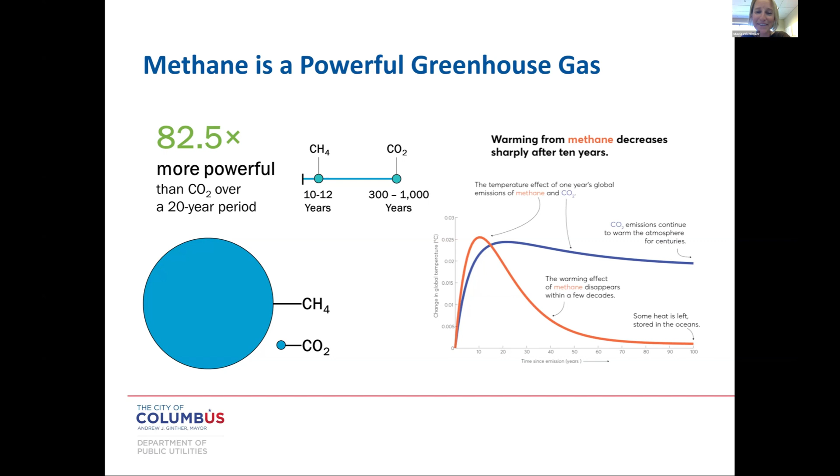And then of course, over time we address the CO2s, the nitrous oxides, and the other ones that are still causing problems as well. And something to keep in mind for us too, methane, it's fuel, right? So that's going to be something to keep in mind for the future parts of this presentation as well.

So when looking at this particular effort and trying to determine what would drive this effort, why do we want to do this, why is this important to us, we've got a lot of things that we'll evaluate when it comes to projects and the different aspects we like to keep in mind when we're scoping and moving through projects.

The first one is safety, right? Odors and safety - methane is a gas, and it's a highly flammable gas, and it causes safety concerns at our plants. Maybe not as much odor concerns as some of the other odors that come out of our facilities. But we know, what we thought we knew, certain areas of our plants that had these concerns for safety - what we found is that we have those concerns in a lot more places than we thought. So that was one of the huge drivers for doing this.

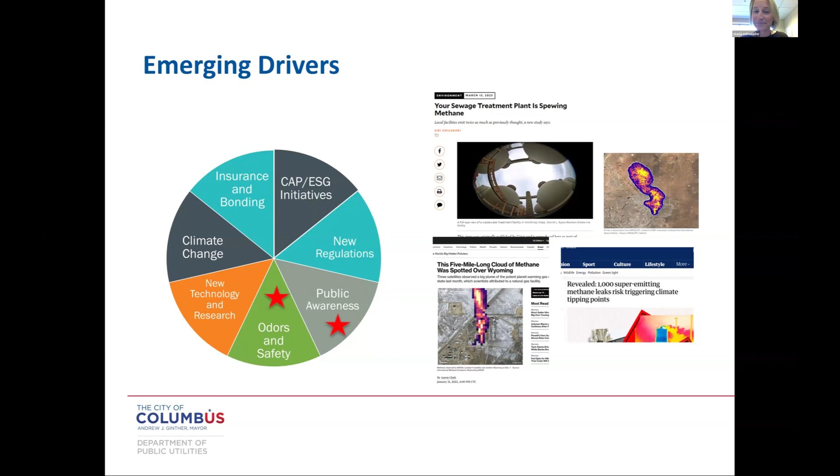Public awareness, that was one of the next ones, right? And this will tie into what I started this off originally saying. We want to know we have the problem. We want to be the first one to know we have the problem, and then to be able to tell the public and others about it. So there are satellites out there that are actually measuring methane.

So there are satellites that have been launched into space that are traversing the planet and measuring methane emissions, or mapping methane emissions. These are generally hosted by or initiated by nonprofits. They're funded by environmental advocacy groups, and they're trying to seek out bad actors - trying to show where the major emissions are coming from, and holding those folks accountable. So the one being shown here is a group called Carbon Mapper. They're flying over the country and mapping all these places where these emissions are happening. Recently they went over the top 10 largest cities in the country and mapped all these emissions, and are working on that data, and will be uploading it to their site within the next 3 to 6 months. So they haven't flown over my facilities yet, but they're going to one day, and then that information is going to be made public.

And so that was, I'm not going to lie, the fear factor was part of it here. We wanted to know what was going on and see what we could do about it. The other element on the slide is our climate action plan. The City of Columbus and our mayor has actually put out a pretty aggressive climate action plan, aimed at reducing greenhouse gas emissions.

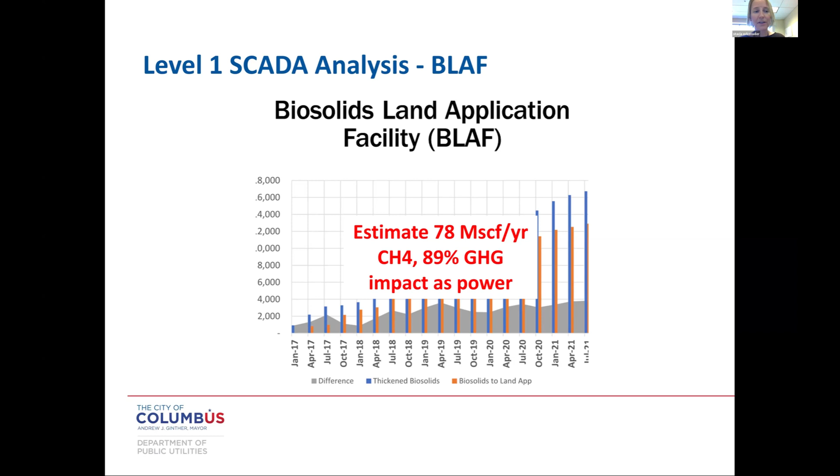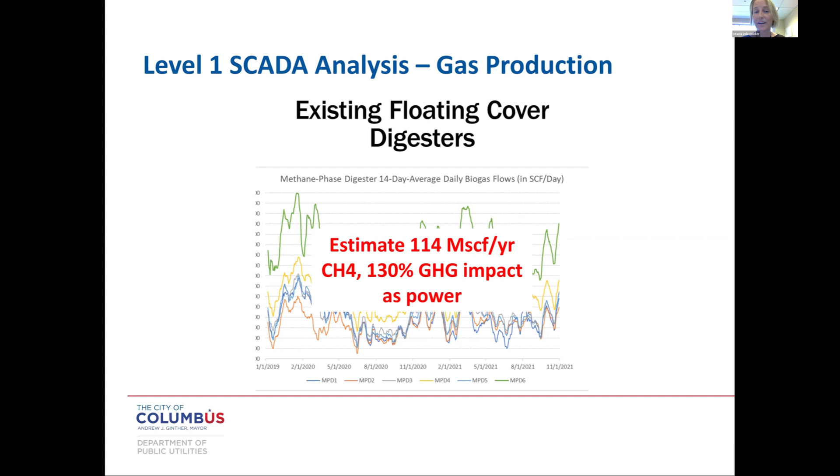That's a lot of power loss. And that's a lot of greenhouse gas being emitted into the atmosphere. So those were the two big items that clued us in, right?

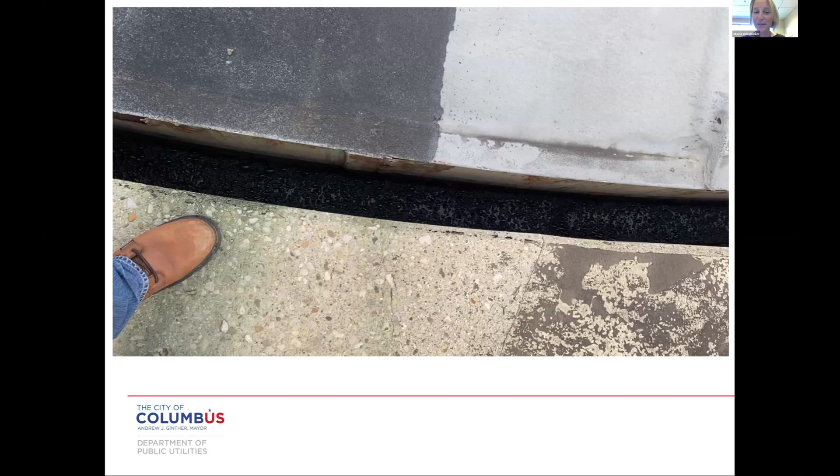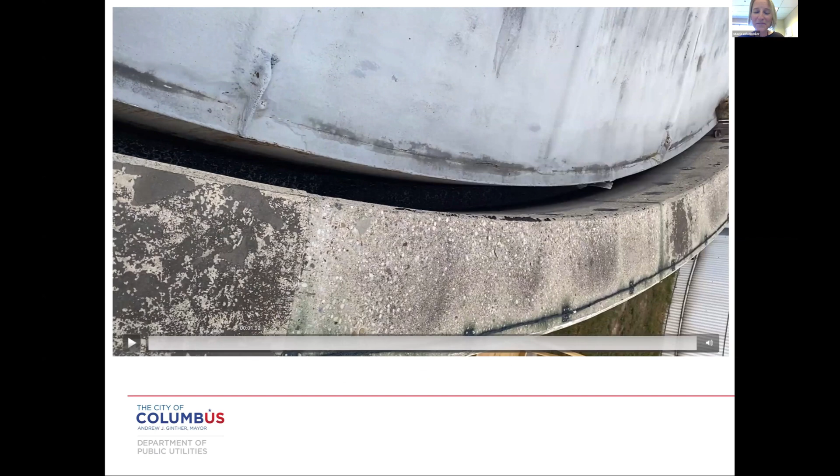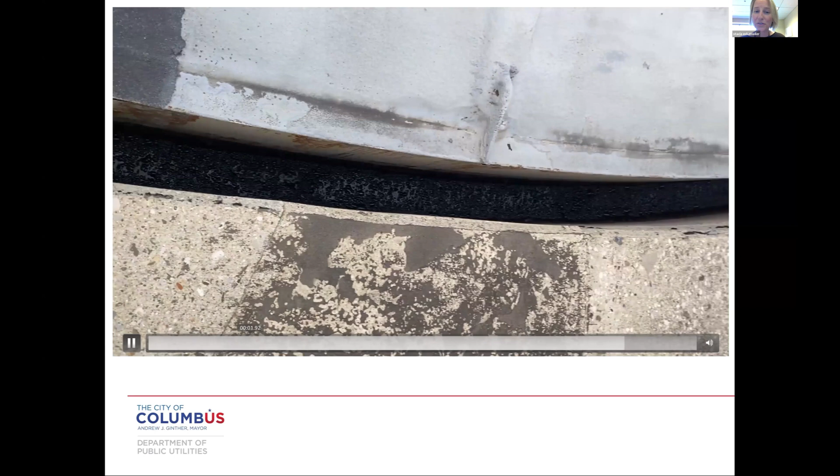If you just go up, this is a video of Dante standing on top of one of our digesters. You just look down into that annular space and you can see the bubbles, that biological activity, and all of that gas potentially coming out of this small seam that runs around all of our digesters. Everybody knows it, we just didn't know exactly how much it was.

So we'll work into the investigation now. I'm going to hand it over to Dante to go into a little bit more detail about what that entailed.

Thanks, Stacia. And I presented that piece, and I am literally pissed that I've never done that Jurassic Park quote, because that is my literal favorite Jurassic Park quote. I can't believe it's in the repertoire now. So thank you, it's going to be a theme in a future presentation, right? Yeah, next time we do a presentation, your face is going to be on a raptor's body. That's already happening, I'm working on it. So thank you, Stacia.

So now we're going to talk about the investigation, and then I'm going to hand it off to Tyler for the solutions. What's super unique, Janine had mentioned, it's the first multi-sensor investigation in the Western Hemisphere. Let's just say it. If anyone else has done it, they're going to correct us at some point. Nobody's corrected us yet. But the coolest part about this isn't just that we found it, that we did the hard thing Stacia just walked through. We investigated it, and they're fixing it too. And it's all happening very quickly in one project, done with pretty conventional technology.

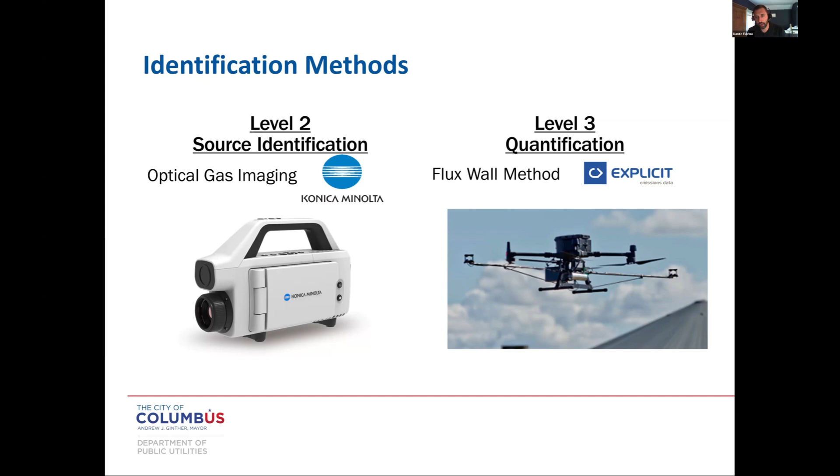With the investigation, there were two levels: level 2 and level 3. First we focused on source identification with the Konica Minolta optical gas imaging camera. That's kind of like the bottom-up estimate—we're finding it, we're pointing at it, it's right there. Then the top-down estimate is for better quantification. You can't just find it and add it all up, it doesn't work that well. So they actually look at wind direction, and they capture the methane plumes and quantify that way.

Looking a little more into the camera, the way it works is actually super interesting to me. It doesn't detect methane directly—it detects gases that deflect light at the same wavelength that's a problem for the atmosphere. The same thing that makes methane or water vapor a greenhouse gas is what this camera is looking for: light being bent at that wavelength through that gas. So it's a very effective way of finding greenhouse gases.

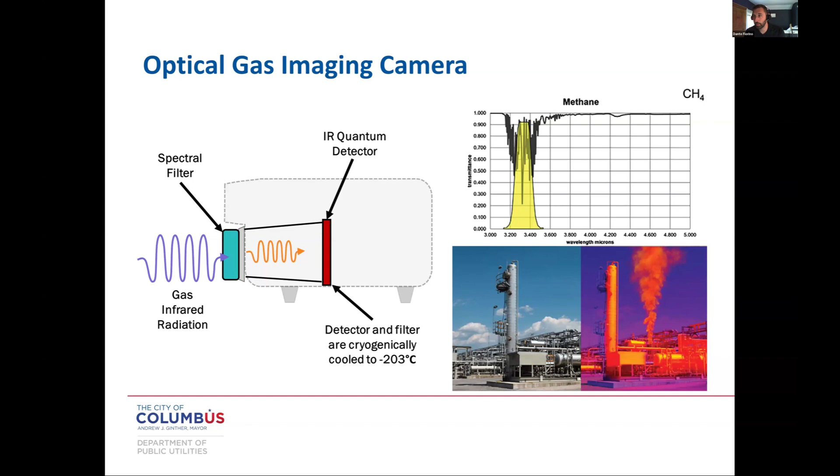Their job is to separate water from solids. They do an even better job of separating gas from solids. That's the first thing that comes out.

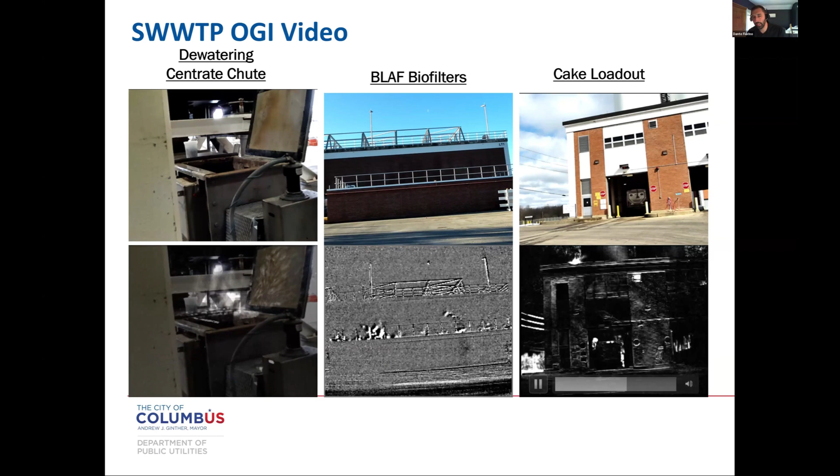And then you've got, this is their cake load out, so they also do dewatering, and they get it, this is liquid, but then the cake load out is solids. And you can even see, there it is, it's being loaded on into the trucks, and there's methane, quite a bit of methane there, and then that is again taken to odor control.

A few more pictures. Oh yeah, they're all moving here. And actually, let me get my little laser pointer. There we have it, you guys can see that. Should have done that before. So this is a PRV. These rascals, every PRV we look at, we find.

So if you're keeping track at home, floating digester covers, lots of fugitive methane. Post-digestion thickening of any kind, centrifuges or anything, a lot of fugitive methane. PRVs, a lot of fugitive methane. And the reason is you can't see or smell it, but all PRVs are designed to be constantly letting a little bit of gas out.

People think that it has to be chirping, is what the operators call it. Chirping is way worse than this, but it's always happening. And the reason is that our biogas systems are not designed for a high enough pressure, it's within the range of where PRVs can release. And so maybe fresh out of the box and installed perfectly, they don't emit. There's not a lot of PRVs that we go to and see that are fresh out of the box or installed perfectly. So this is a problem.

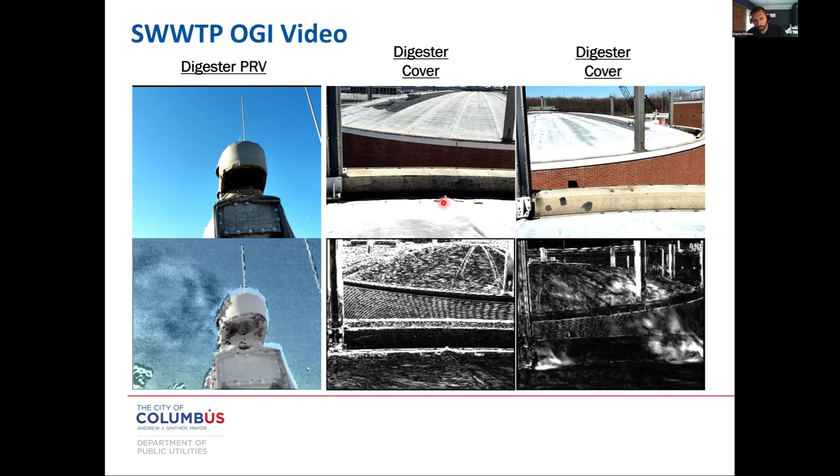Now this is super interesting. Here's the annular space that Stacia showed you the picture from the top. And we've got two same digester, but one is not mixing. And then we turned on the mixing. So you can see, clearly, when there's mixing going on, everyone is aware that there's more biogas produced.

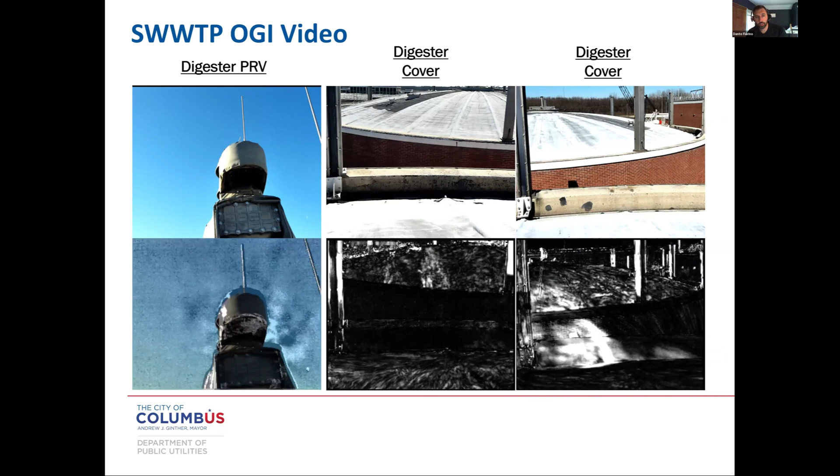Here's another super interesting, crazy thing. We had a structural engineer inspect this weeks before, came out perfectly fine. We just had the camera out and there's a big leak on the side of the digester and it's emanating right into an exhaust fan that leads to the tunnel system. This is a health and safety concern.

We were putting together a report. We took this video, we shared it with Tyler, who's going to be presenting in the city. And this is not an explosion proof fan, so that was replaced immediately. That was a health, and there were a couple of health and safety moments that we had that were really important. This was probably the most shocking.

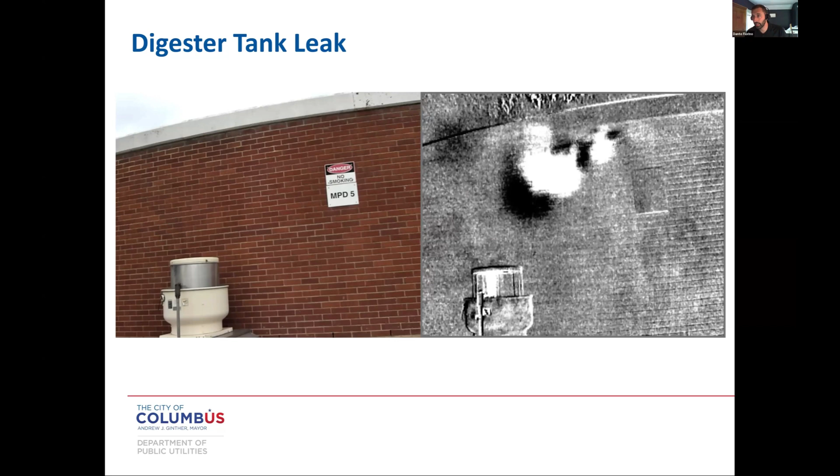But another thing that's really interesting about this, with the camera, you can see what we see live right now, you can see while you're out there. And Trung and I, we could see this leak, but I went up there and touched it and my finger would stop the methane. I couldn't feel it, I couldn't see it, I didn't see a crack. It's really a silent killer. You just have no clue it's there and there's no way you're going to see it.

So that was remarkable. Now we're going to pivot to the drone flux, the quantification piece. So the way this works, it's pretty simple from a technology standpoint. It's a pretty standard drone, they've got a gas inlet and 2 wind sensors. And so what they do is they go downstream of a big plume or a potential plume, and they run a flux wall, that's what they call it.

And so this is kind of like a nice graphical representation. But what this is showing here is, okay, well, here's the ground, and they just start to run and they go up a meter. They're Danish, come across, up a meter, come across, and they do that. And they do 3 walls and they average it out, and it's very effective. It's actually an accredited way of measuring methane. The natural gas utilities are using them, and they have been accredited for multiple countries, including the US. So this is an accepted way to quantify methane.

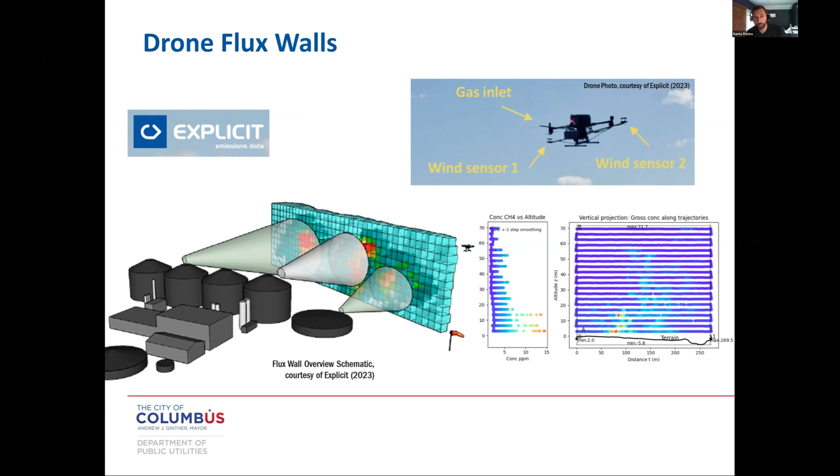We did that. Our first, the 2 examples that Stacia had offered to you, the digesters and the BLAF tanks, this was our first thing that we wanted to find. They did the flux wall right here. These orange lines represent the wind direction, and so the wind's blowing this way.

They did the flux wall right here, and you can see this is the actual real results, and you could see it in real time. And the average of these 3 runs was 50 kilograms per hour. It's less than what Stacia's data would suggest, it's actually less than what we would have calculated based on Stacia's data, but it's more than anybody wants, 2,400 cars per year just in this site.

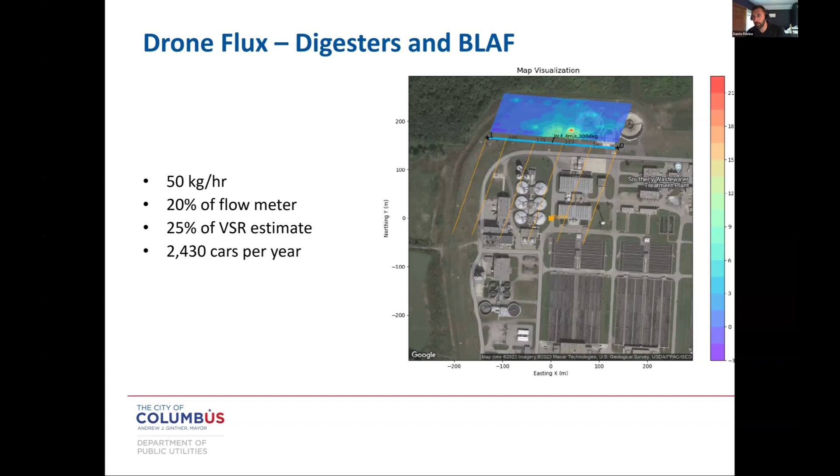The surprise was, and I've already kind of revealed it, but we didn't expect the centrifuges. I don't know why, but we did a bunch of surveys throughout the plant, and this was another very big contributor. This one was 18 kilograms per hour, which, since there's only one source, is actually pretty comparable to the prior sources, another 880 cars per year.

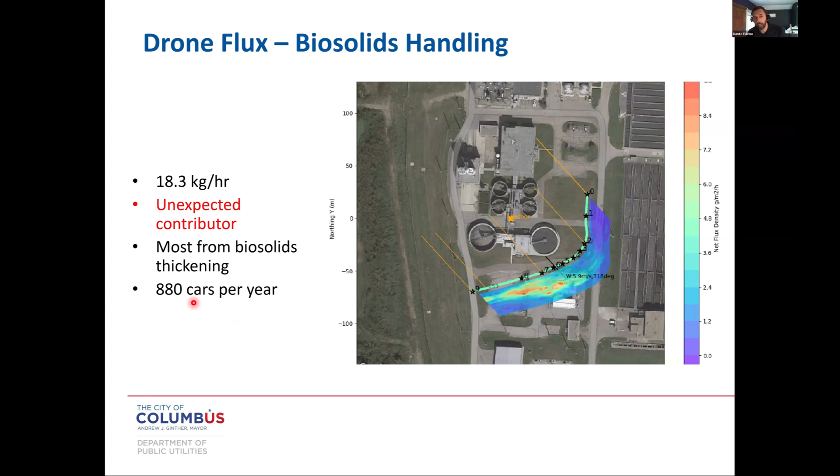So if you add all this up, it gets to about 70 kilograms per hour that we found. One thing that's noteworthy is we checked the waste gas burner, an open candlestick style waste gas burner, and actually it was burning pretty efficiently. You expect with any combustion there's going to be slippage, and it was at about 0.5% slippage, which is less than the EPA assumed 1%. Just to put into context what the EPA would consider acceptable, or what's in your climate action plans for emissions at any given wastewater plant, is typically 1%. That's 4 kilograms per hour.

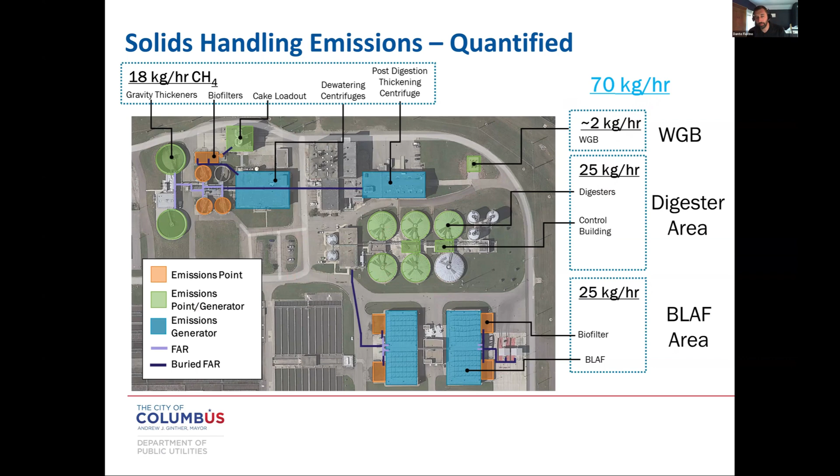Southerly found 70. And this is not unique, they're not uniquely bad. They're 20 times more than what you would expect. This is everywhere. Almost every plant - floating covers are maybe a little unique, but a lot of plants have them. This is a problem we have in our industry, and it's causing real problems for the environment.

So what does kilograms per hour mean? I didn't really know until I started getting into this type of investigation more. My colleague Nancy Andrews estimated, if you have a cogen facility at your plant, how much methane leakage do you need until you start behaving from a greenhouse gas perspective like a fossil fuel power plant? All you need is 7% to be like a natural gas power plant. If you have 15% leakage, you're similar to an oil plant. At 19%, you're a coal power plant.

The day that we went out there, just with what we found, it was 15%. If the SCADA is right, which is probably more accurate because it's over multiple years, but it is theoretical, it would be off the chart. The reality is, I think it's fair to say, Stacia, anywhere here is not acceptable. The city was very motivated - they're doing the right thing for the environment, and they don't want to be doing this. So I always find that very interesting and informative.

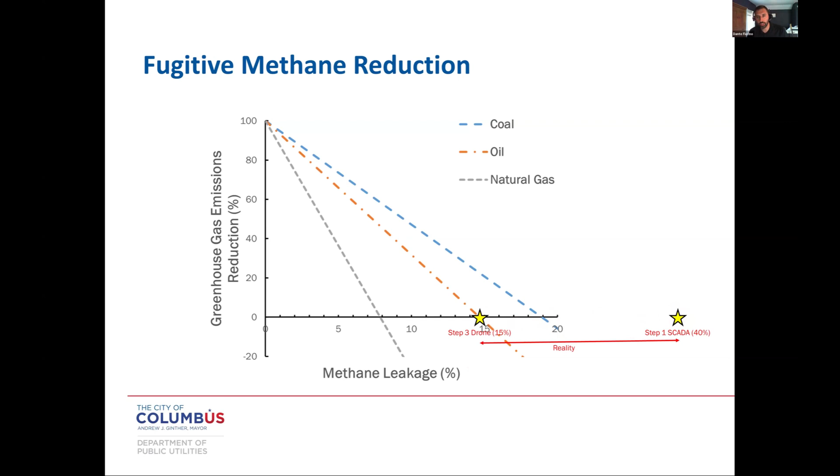And then I'm going to show, because Tyler's going to show you with the bioenergy project and the work Columbus is doing, how much of an impact we're going to have. But I did want to show you, if nothing was done - I already talked about the 70 kilograms per hour - if nothing is done and they continue to grow like we expect in Columbus, the 30-year outlook is 130 kilograms per hour. At 100 kilograms per hour, they're actually considered a super emitter, and the federal EPA is actually starting to crack down on that.

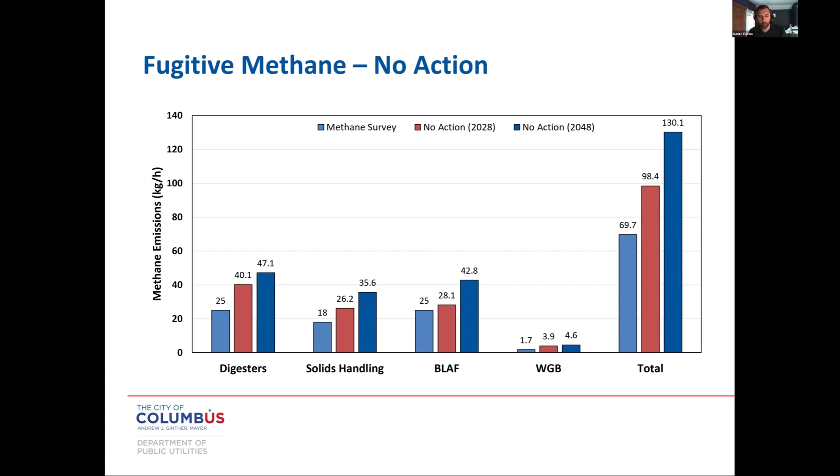I did actually look it up - they're starting to issue fines on a per kilogram per hour basis. If Southerly was fined, which presumably will happen one day in the future, I can't tell you when, it was actually $75,000 a day. So this is not a trivial amount of methane, and they're dealing with oil and gas people first, then landfill people, and then they're going to deal with us. So, doom and gloom, big problem - what do we do? Tyler's going to come and save the day. So, Tyler.

So after we saw all of this negative stuff, the focus on our end really turned to, okay, how are we going to fix it? We know our major contributors: we've got our floating digester covers, our biosolids holding tank, our thickening and conveyance, and our PRVs. But how do we address each of these individually? Well, for us, the low-hanging fruit here was obviously our digestion system. Go ahead, Dante, go to the next one.

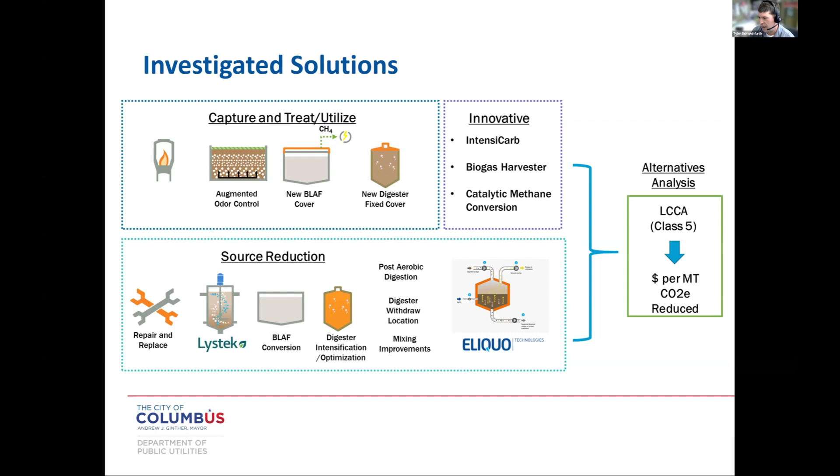We looked at each area individually, at source reduction and capturing and treating. We first looked at our digestion system as a whole, because that's where we found the most emissions coming from.

In our existing state, we hold our solids for 15 days. We are SRT limited at our Southerly facility. We have 6 million gallons of digestion, and we're already holding solids back into our secondaries just so we're not overloading our solids system. That's causing undigested sludge, because we'd like to hold it 23 to 28 days. That undigested sludge is working its way through our facility toward the back end, pushing that methane into other areas. So if we can digest it in the digesters first, we can solve a lot of issues.

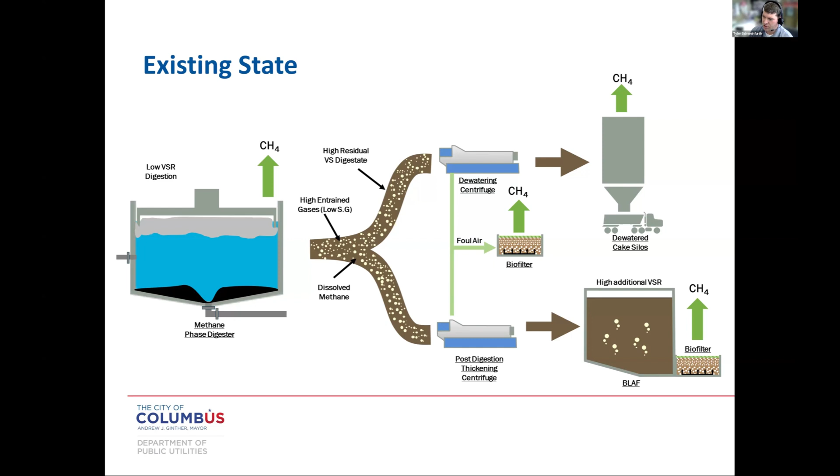So we're looking at doing what we're calling next generation digestion. That involves constant mixing, surface withdrawal, and a longer SRT. We're talking about adding a significant amount more capacity to the facility to allow us to get to those longer SRT times.

We're also looking at fixed digester covers. Let's close up that annular space and capture the gas that's coming out of it.

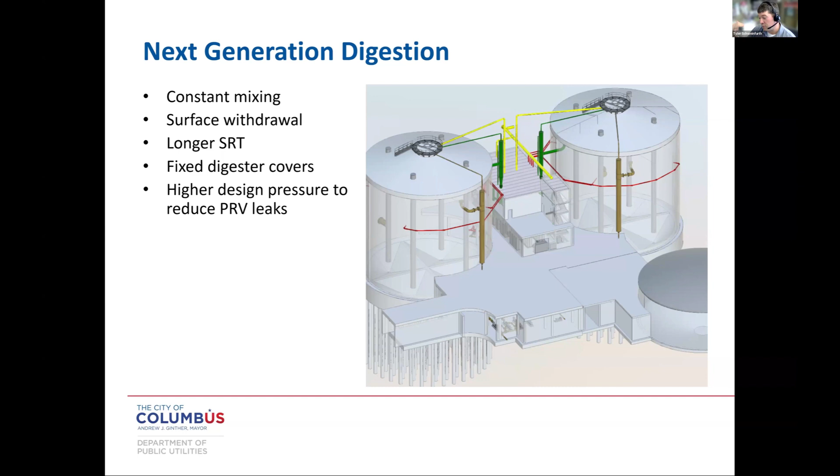So now we're looking at a 60-inch water column. It doubles the pressure within the system, but it also gives us a wider operating band. So if we're operating at 20 inches of water column, we've still got 40 inches before the PRVs should be emitting, but we know it's probably more around 50 inches of water column. It's just a wider operating band for us.

So what does the future state look like? Well, we get more VSR digestion in the new digesters and the rehab digesters. That's getting the methane out in the digesters and preventing a lot of that methane from going downstream. So we wouldn't see as much at dewatering, we wouldn't see as much at thickening, and more importantly, we will not see as much in BLAF.

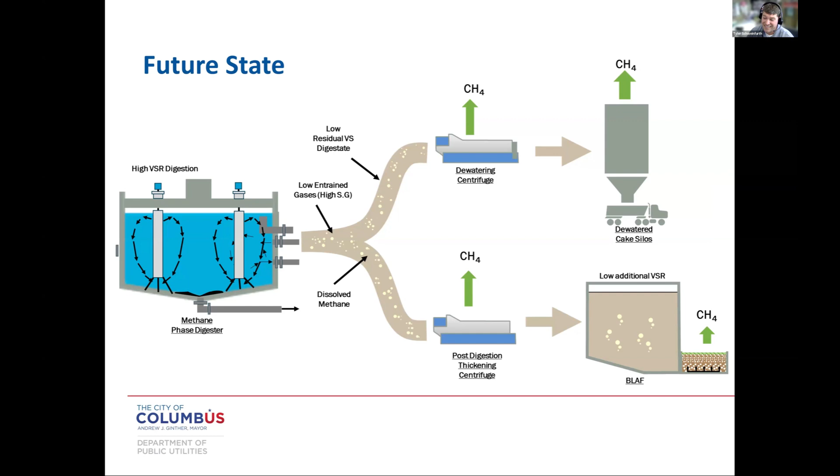And just by doing the enhanced digestion, we've already reduced down to 94.6 kilograms an hour. That's a significant decrease just through the digestion system itself.

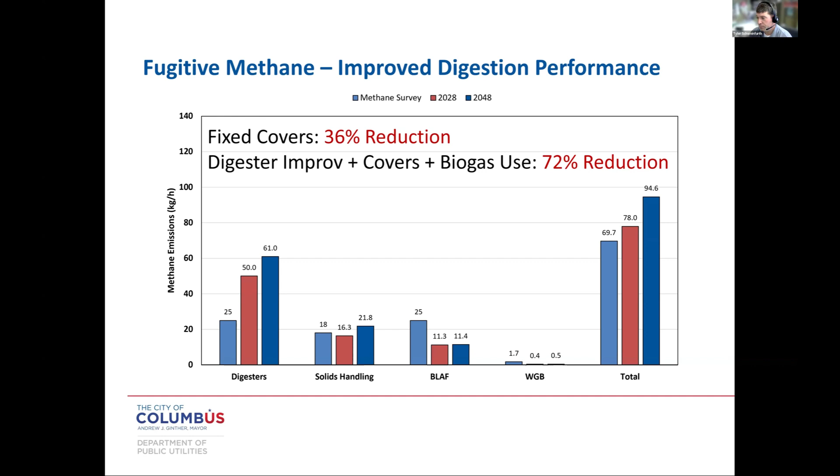But if we fix the covers, if we go to these concrete covers, that's a 36% reduction in our methane emissions. And by going through all these digester improvements, upgrading the covers and adding a biogas reuse, we're getting a 72% reduction in our methane emissions. So it's a significant reduction when you talk about this overall project.

And right away, two of the low-hanging fruits here get knocked out right away, our digesters and our PRVs. We've addressed these known significant contributors.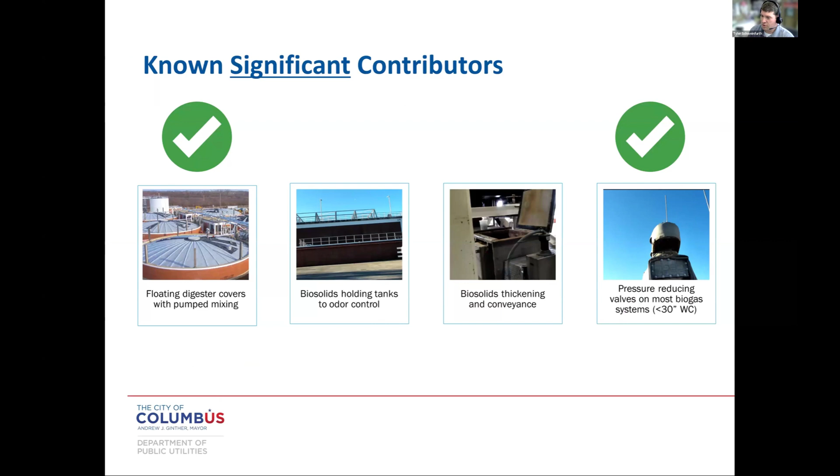So then we looked at our biosolids tanks, our BLAF tanks. We had several options that we looked at here: augmented biofiltration, vapor combustion unit, regenerative thermal oxidizer, doing a fixed concrete cover on the BLAF tank, and also doing a stainless steel cover on the BLAF tank.

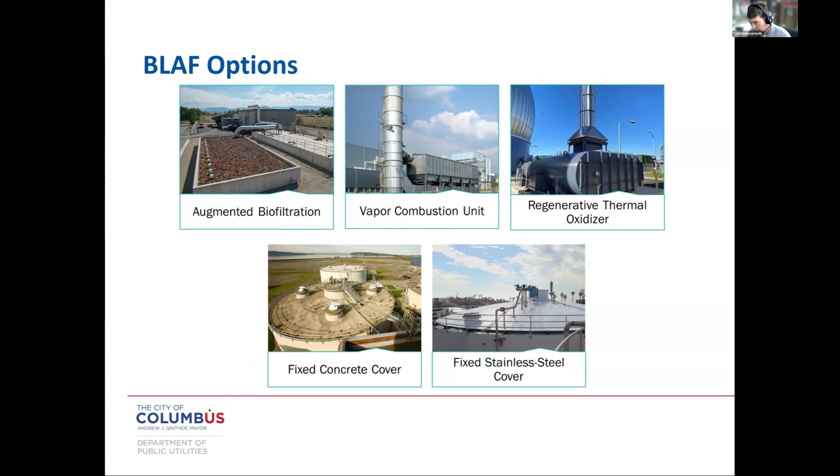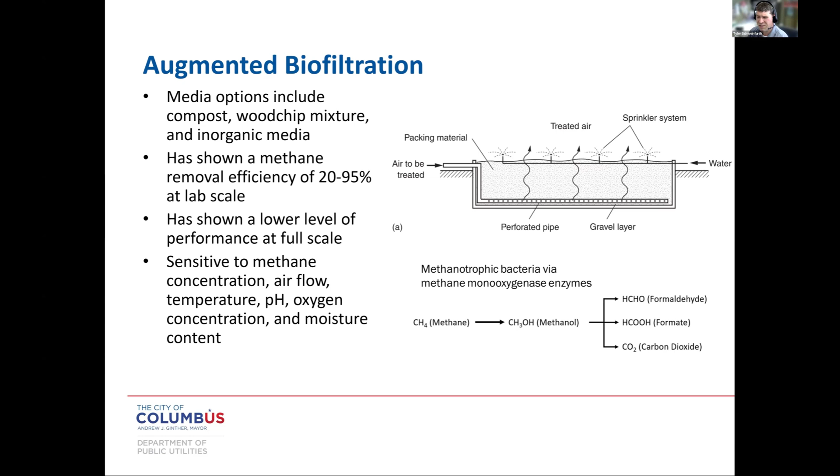I'm not going to touch too much on this. The augmented biofiltration is finicky, I guess, for lack of a better term. It doesn't work real well when you start getting outside its nice, easy operating condition. Once you get outside of that with pH, oxygen concentration, moisture content, it really doesn't work as well. So we just didn't see it as a feasible alternative.

We looked at this vapor combustion unit specifically for BLAF. This is great - this is used in oil and gas. It works really well at reducing these emissions. But there's only a few that are installed at some wastewater facilities.

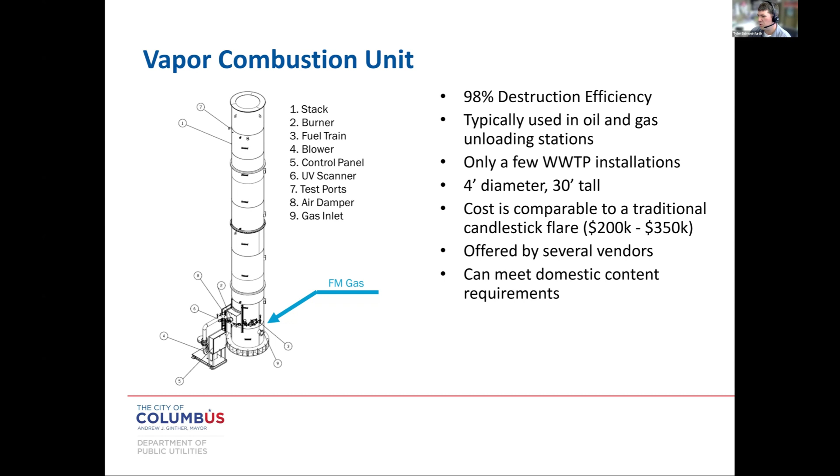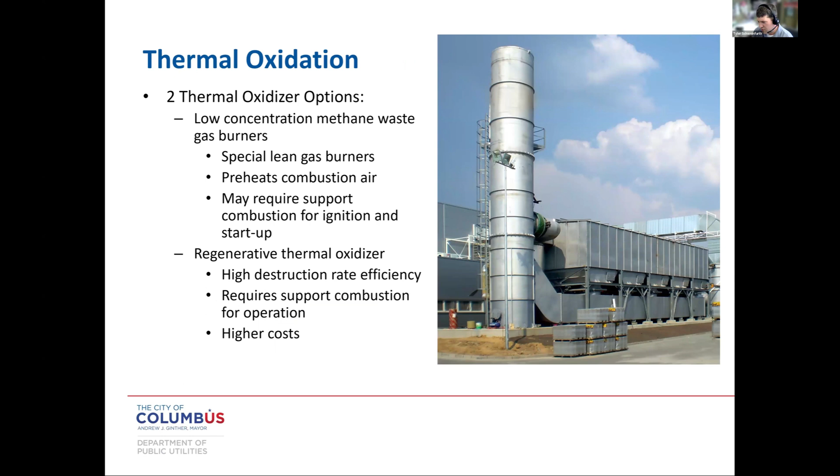So then we looked at thermal oxidation. There are two types: low concentration burners, and the regenerative thermal oxidizer, which is the one we honed into here. Great destruction efficiency, still requires some support combustion, and it is a higher cost piece of equipment.

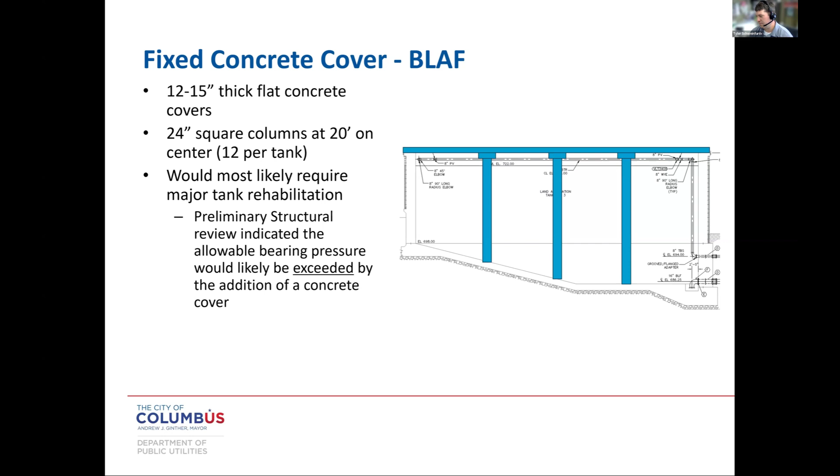Then we looked at potentially putting a fixed concrete cover similar to the digesters on top of BLAF. This was not structurally possible - it's just too heavy, and the tanks weren't designed for this originally, so this was thrown out relatively quickly. And we also looked at a stainless steel cover.

It's got a stainless steel cover on it, but this would have been a little bit different design, better seal on the outside of it. And it wasn't a major rehab.

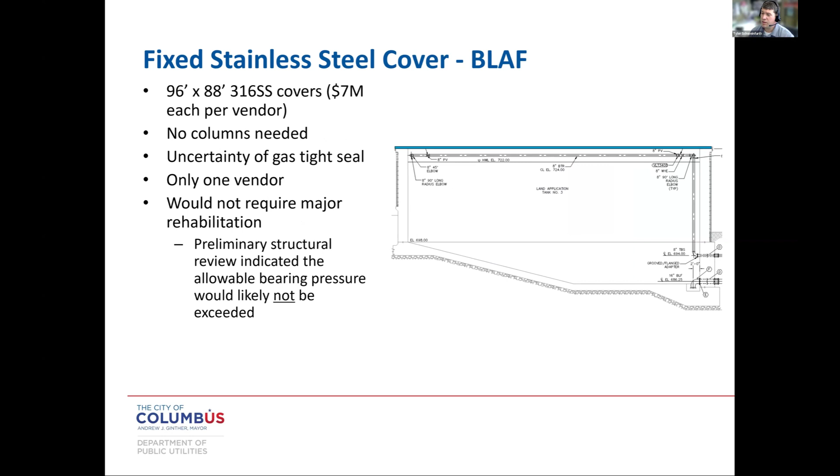So then we compared all 5 of these, and what we really found is that the RTO was our best option here. What happened with the VCU is this is such a lean methane, we were pulling so much air off the BLAF tanks into such a lean methane concentration that we would actually be burning more natural gas to operate the vapor combustion unit in this scenario. So really the RTO seemed to be our best case here.

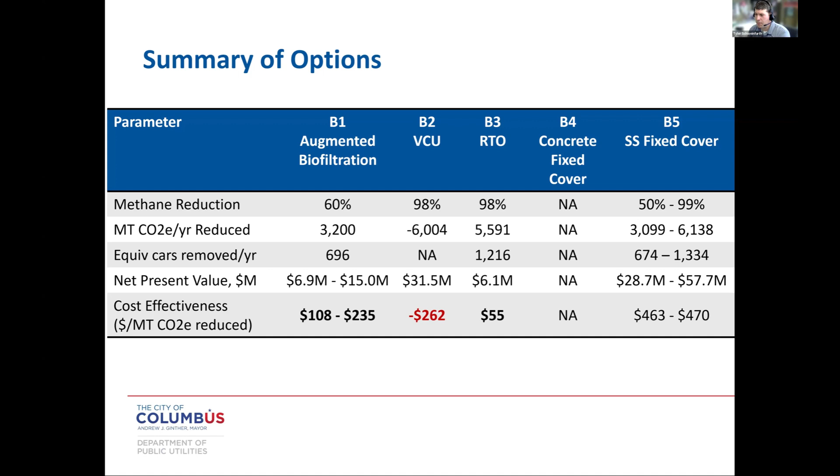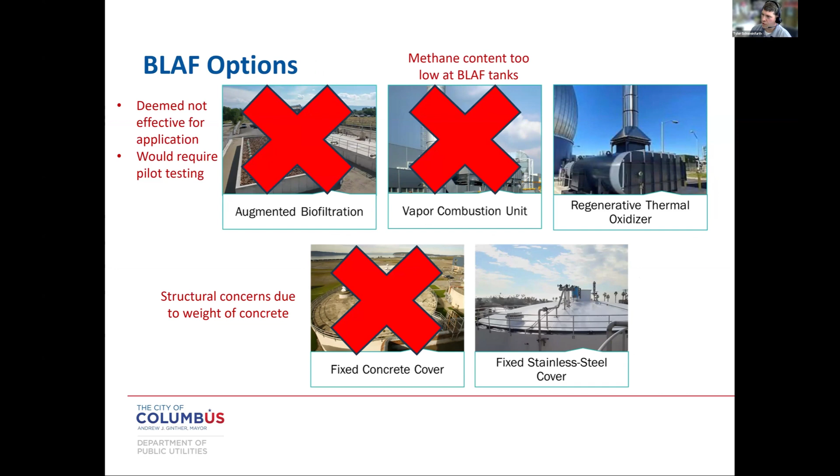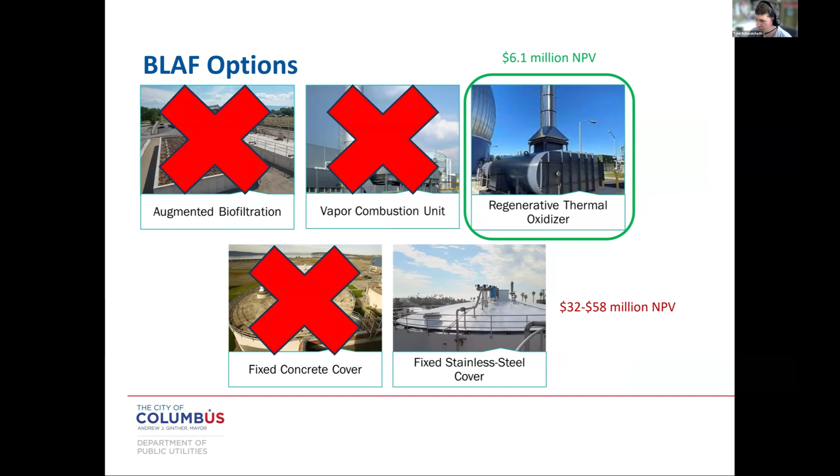And then, yeah, here was what we settled on. It was either the RTO or the fixed stainless steel cover. And then when we looked at a net present value on both of them, we found that the net present value for the RTO was much, much better than the stainless steel cover. So that was what we initially settled on for the BLAF tanks. And we'll kind of come back to that at the end because that's not where we ultimately wound up.

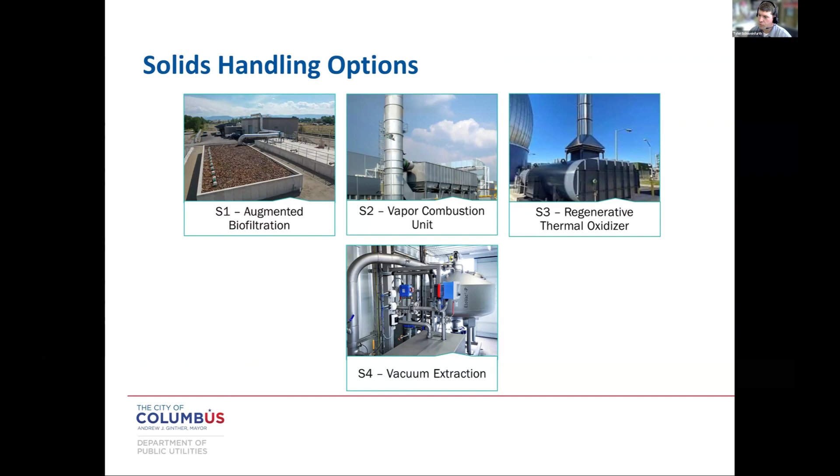So then we looked at biosolids handling, and we looked at a lot of the same things: augmented biofiltration, vapor combustion unit, regenerative thermal oxidizer, and a vacuum extractor. So really the only new thing here is vacuum extraction on the digester. This is a really novel process. It's very interesting. It really helps with phosphorus removal because you're also creating the right conditions to precipitate out a brushite or a struvite.

But what we found is we didn't have the right conditions for this product. The vacuum extractor really needs a biological phosphorus removal in your aeration basins, and we actually have just switched away from that due to expected increased nitrogen loading. So this really didn't seem feasible for our process at the time.

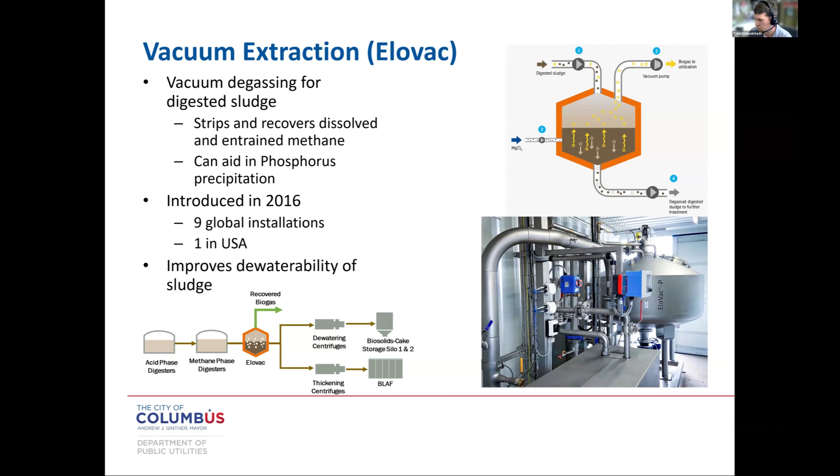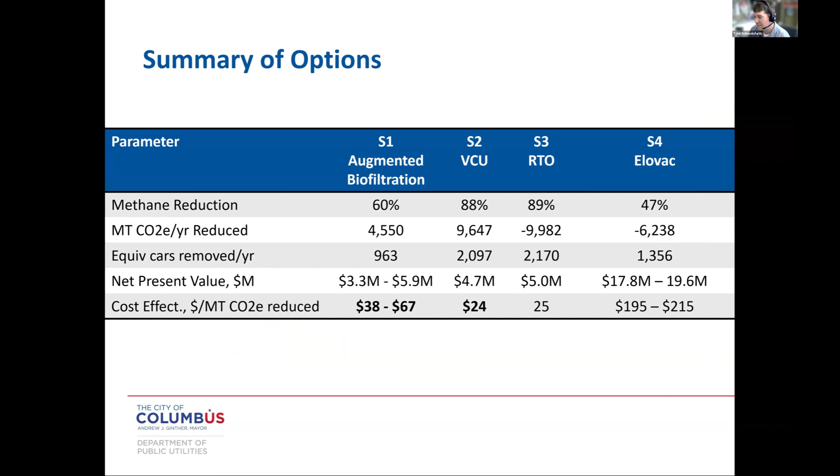So again, we looked back at this and we found, okay, augmented biofiltration, pretty good. Hey, look, that VCU that we kind of threw out in the original analysis popped back up here. This is a little bit stronger of a methane concentrated stream, and it's not as much gas. So the RTO and the VCU were comparable.

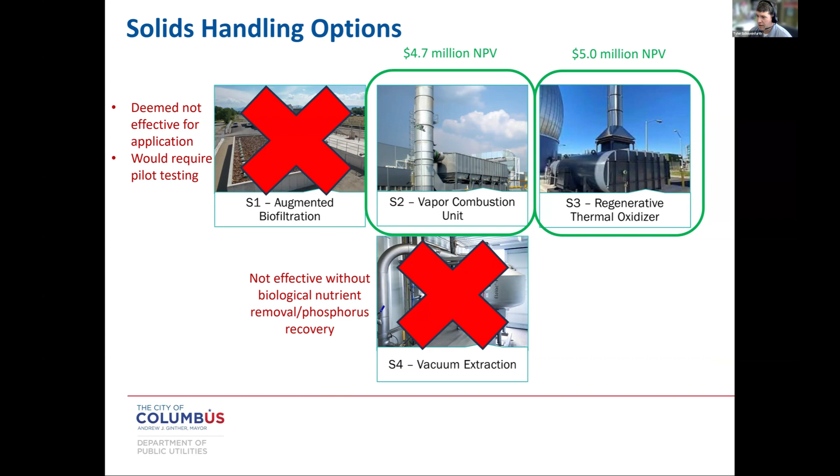So how are we going to implement this? Well, we have a 2-phase digester system. We're one of the few 2-phase digester systems where we actually have an acid phase digester. We have 3 acid phase digesters that we cannot burn that gas or reuse any of that gas. It has to be thermally destroyed.

So the easiest thing for us to do was actually to use that vapor combustion unit and pull in the biosolid stream, pull it into that and just use it there as a gas to help burn off the sour gas that we produce. Which means, and you'll see why, the BLAF tanks we're looking at as a future potential upgrade to that system.

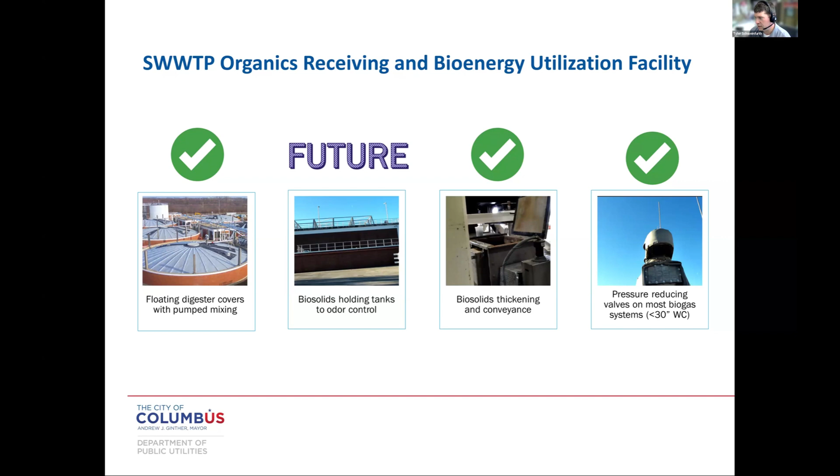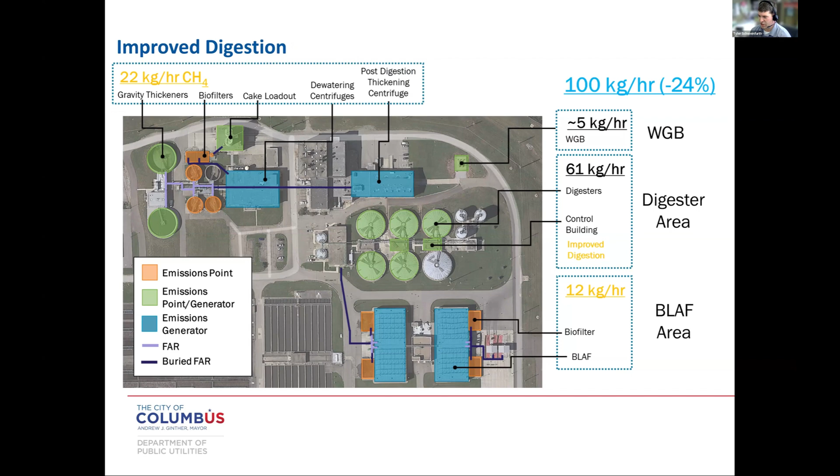If we just improve the digestion, we're down to 100 kilograms an hour, a 24% reduction. That's just improved digestion.

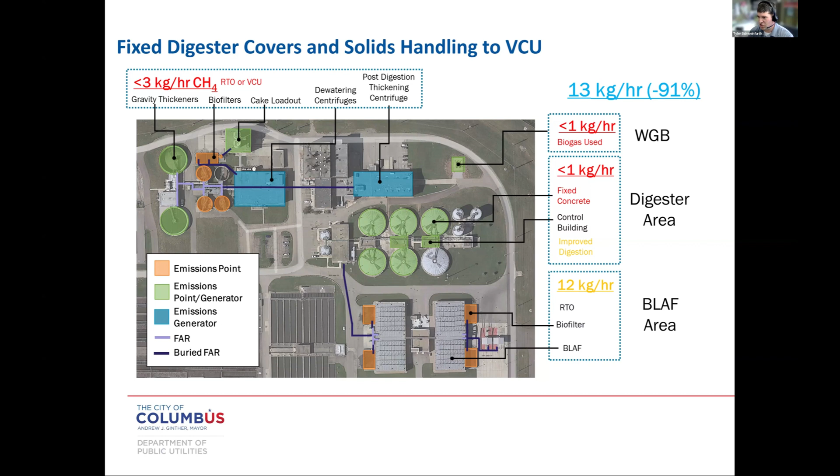If we fix the covers and put in the solids handling, all the solids handling gas to a vapor combustion unit, now we're down to 13 kilograms an hour. That is a significant reduction. That's a 91% reduction in our methane emissions just by doing these things.

And looking future, this is why we kind of settled with pushing BLAF out a little bit. It's only another 4% by adding the BLAF tanks into this and putting that RTO in. And it's a significant capital cost increase to add the RTO for a 4% reduction. We're getting most of our reduction, over 90%, just by doing the things we had already talked about. So this is something that we've pushed as a potential future project down the road here to see where things land. But those are the major upgrades we've done.

And with that, we'll take any questions you might have.

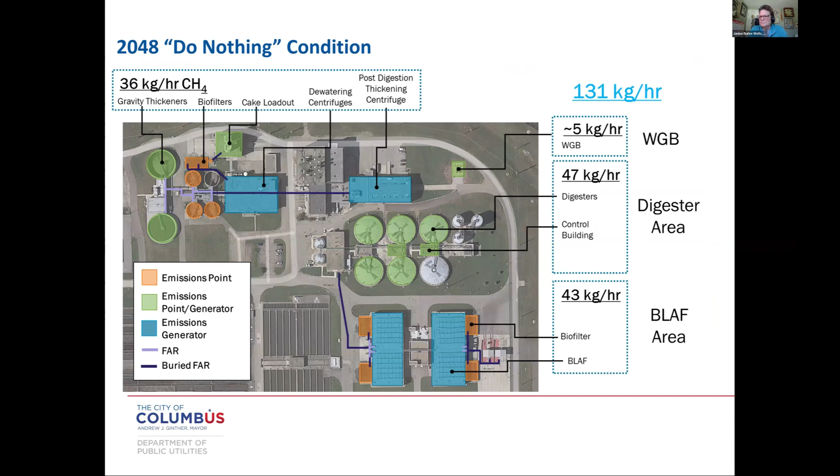Yes, so that is something that we have evaluated for sure, because we're actually in the process of bidding our CHP facility, and that is a consideration we put in there for fog and food waste. We hope it's something that we can do, if not immediately in conjunction with the project that's currently out on the street. Definitely something we want to do in the future, and we've already talked extensively with the folks that run our landfill, which is more of an authority, and the city of Columbus doesn't actually own the landfill. But they're all in, and they have a huge food waste diversion program. They're composting a lot of their food waste, and in the future, yeah, we hope to take some of it at our facility as well.

Yeah, especially right now, the renewable fuel standards with the RIN number change, so probably will be a huge benefit to do that. Yeah, for sure. Thanks. That's great. Yeah, that's great. Forward thinking. Got another question here.

What are the anticipated operating cost advantages of adding CHP in the future?

Well, I guess I can tell you, CHP is moving forward. It's a current project that is being bid right now, and it was always something that was in our future plans. We actually have CHP engines that are already constructed at our other plant that are getting ready to go into operation. And Southerly was at some point going to be heading down that same path as well.

We spend, I don't know, about - blanket on the number here - something like $500,000 a month in power costs. And we know that the vast majority of that is our blowers, just creating the air process, right? It's a very costly and power intensive process.

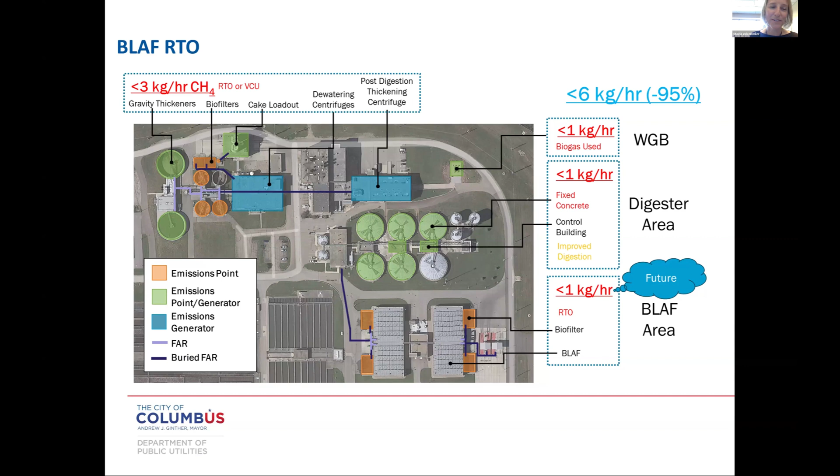We are running out of time here, but Dante, could you say one or two of the most important things for designers of these systems into the future? What are some of the things we should be looking at as designers?

Awesome question, and I would expand it, not just designers, but also utilities. You hit on the point that I think is the most important. There's problems, and Columbus is super innovative, and they're addressing the problems that they have. I don't think every utility is going to do that, or at least not until there's regulations driving them to. But the one thing we've got to be sure of as designers is we're not making the same mistakes that we've made now that we know.

So yeah, Brown and Caldwell, we've totally changed our standards. We don't want to make the same mistakes we made before. If there's one thing folks on the call can take from this, it's that as you're looking ahead, besides just considering this as part of your capital improvement plans, make sure you can spend maybe no more money at all, and just make smart choices about how to mitigate emissions. That's probably the easiest low-hanging fruit you can get out of it.

Don't install floating covers on your digesters. Just don't. Right, don't do that. That's a pretty straightforward one.